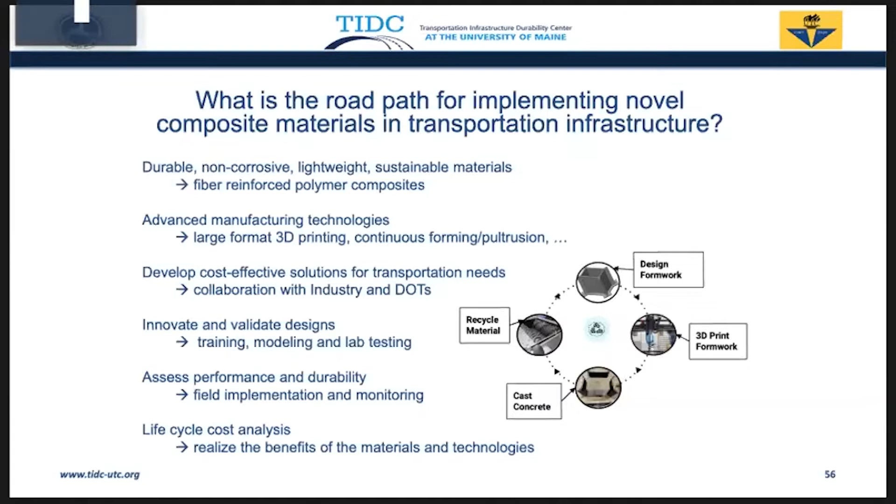We need advanced manufacturing technologies. What technologies are available today? We're going to discuss large format 3D printing, continuous forming, pultrusion, and other manufacturing technologies. We need to develop cost-effective, sorry, cost-effective solutions for transportation needs.

Train students, train personnel, staff, do the modeling work. This is not just trial and error. We need to be able to predict and to design using rational approaches and then verify through lab testing. We need to assess the performance and durability in the field. And for this reason, we need demonstration projects where we implement and we monitor the products that are being used in transportation. And finally, we need to encompass this through a life cycle cost analysis.

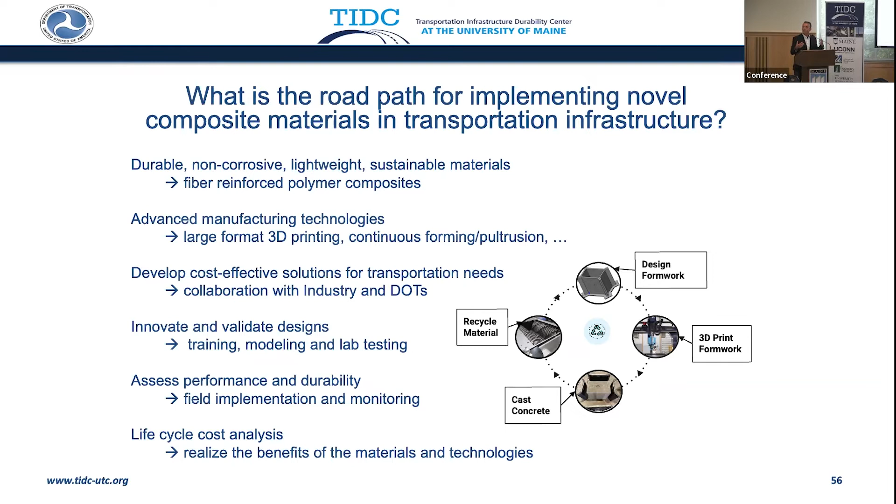And here I am using the words from the commissioner yesterday, realize the benefits of the materials and the technologies. And in fact, we're looking, for example, at how to recycle these materials, how to reuse them. Briefly, I will mention 3 projects just to see how needs and solutions can be matched. We mentioned this project before in other presentations, 3D printed diffusers for highway culvert rehabilitation.

What is the problem? Well, we heard about the problems. Roads that are closed because of flooding and problems of erosion, the culverts that are being corroded and they need to be replaced or maintained. The solution was brought forward by a hydrologist from Maine DOT who came up with the concept of culvert diffusers. These are basically gradually flared outlet sections that have the function to increase the culvert capacity and compensate for the loss due to liner retrofits that are used in trenchless repair technologies.

But at the same time, we need to reduce the outlet flow velocity to minimize erosion. This was a great solution, but it was lacking the materials and the manufacturing methods. And here comes our role. We marry this with large format 3D printing. It's the ideal application because the diffusers are unique.

The geometry, the design depends on the site conditions. No other manufacturing method could be cost effective. Optimized 3D printing solution is what we are implementing here. We are in the 2nd generation of diffusers. We installed prototypes last year in collaboration with Maine DOT.

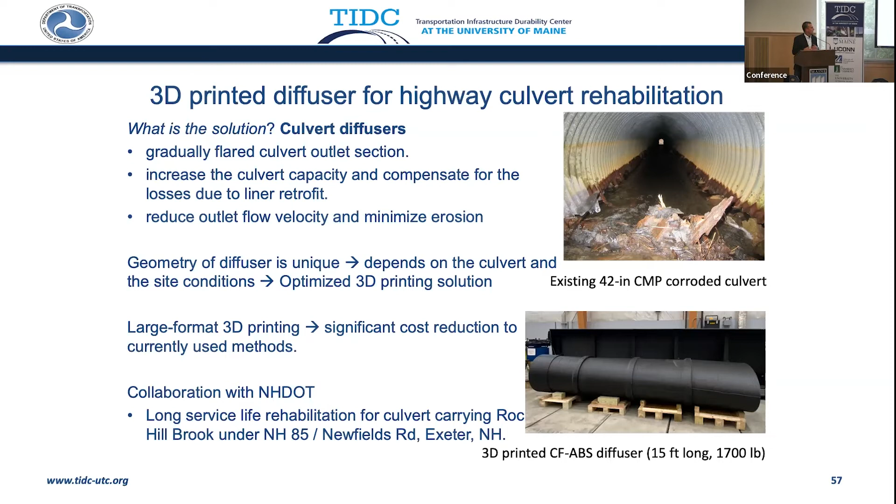We are doing now a full site installation in collaboration with New Hampshire DOT for a road in Exeter, New Hampshire. The benefit is the reduction in the cost. The project in New Hampshire is a deep culvert, about 20 feet. The excavation would have been very expensive. It would have interrupted the road. Again, this is a project where we can satisfy those needs with new materials and technologies.

Another one, and also using large format 3D printing, is making formworks for precast concrete. This was an initiative that came to us from the Precast/Prestressed Concrete Institute. We had a series of meetings with their partner precasters and fabricators, and we identified one partner here in Maine, American Concrete Industries in Veazie, not far here from campus, who had a project with Maine DOT, and working together, we designed a set of formwork for a railroad bridge ballast retainer, a precast concrete structure.

This formwork was deployed last fall at their facility in Veazie. It has been used 6 times to cast the modules that you can see here in the picture below. And it's another good example of how we can use 3D printed materials in construction applications for the transportation industry.

Something very important is that the material we're using here, about 7,000 pounds of composite material, becomes an asset that can be recycled. And that's exactly what we're investigating right now. How we can chop this material, how we can pelletize it and use it again. So again, this doesn't go to the landfill. This goes back to be reused, but this is not a trivial question. There is energy involved. There are properties that change over time.

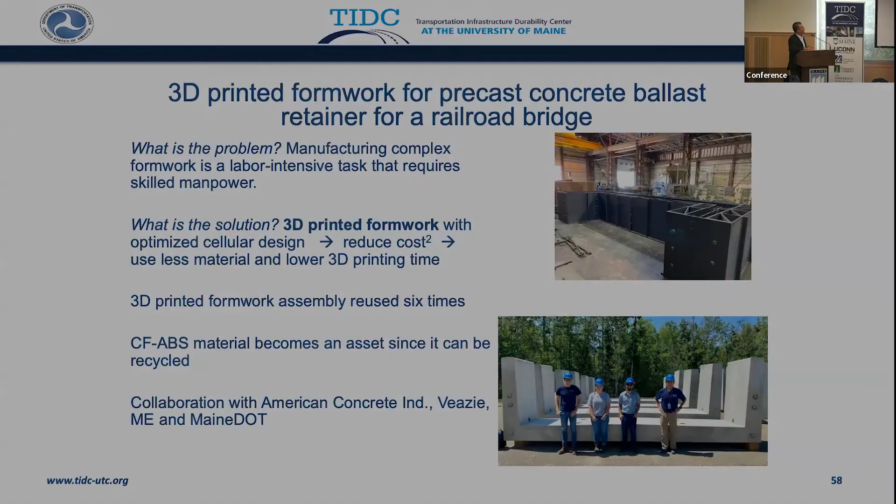Finally, Habib mentioned the thermoplastic composite rebar, and I want to leave this here as kind of food for thought, and kind of motivate discussions. This is a new technology that can address some of the shortfalls of the existing thermoset rebar that basically cannot be bent. And that introduces a number of limitations at the construction site and therefore cost. The thermoplastic rebar with, I would say, modest amounts of heat and pressure can be shaped and bent. We can form stirrups. We can adapt it to the geometry required at the construction site.

Now, this technology requires a solution, and the solution implemented here at the University of Maine has been very comprehensive. We brought together a team with diverse expertise. We have mechanical engineers, electrical engineers, and structural engineers who came up with a fabrication process that has been streamlined, and Habib showed one of the first prototypes.

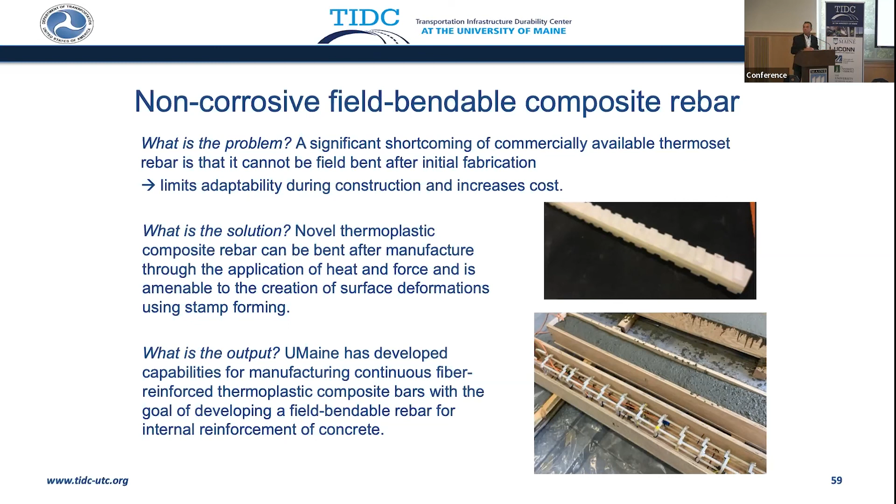There are still many steps to move forward to get this product commercialized, but we are getting there. We are marking and checking all the needs and making sure that we can have a product that will have the right surface texture, a product that will have the right properties to be used as concrete reinforcement, and that can be handled and bent in a way that is cost efficient.